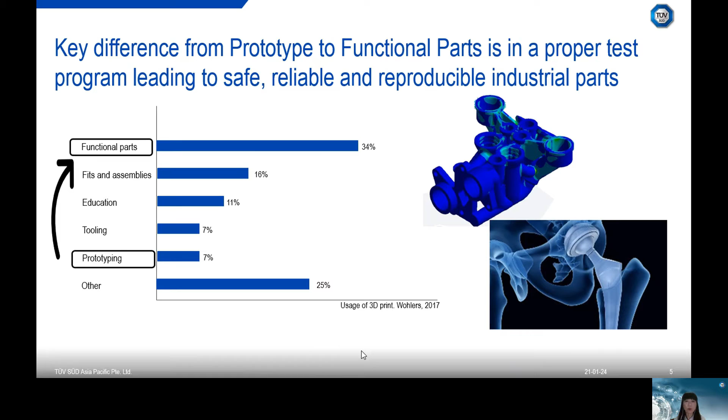Secondly, what we noticed from the Wohlers Report figures is also a transform from prototype to functional parts, which means quality of the parts becomes more and more important, and end users are concerned more and more about quality and consistency than before. That's why ISO and ASTM are addressing this issue by establishing committees like F42 and TC 261, to meet the newly developed standards, and managing quality becomes a focus for service providers who want to stay competitive.

Now let's look at what the challenges are in harnessing AM opportunities for companies who would like to start their AM journey or have already started their AM journey.

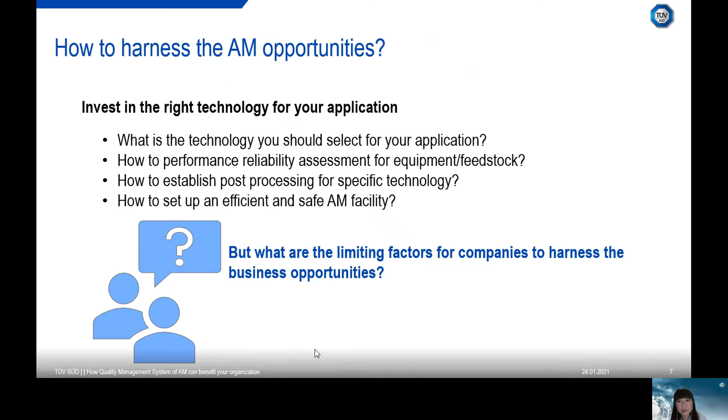So if companies start to adopt AM, can they improve business from these activities? Before that, there are 4 factors you will need to address before you can successfully establish your AM production facilities. I have listed 4 considerations, but there might be more. We have seen companies struggling to establish an efficient and safe facility that meets the applications, and this definitely needs to be addressed before you set up your facility.

Next, let's hear some feedback from end users and buyers. The buyers have some doubts on AM quality. Is it cost versus benefit justified? Can this AM part fit its intended use application? Is the AM part as durable as conventional parts? Am I getting the same quality as the first golden prototype? Or am I fulfilling regulatory requirements, if any?

So what we see is that trust in AM is a big concern when buyers would like to purchase and use AM parts for their applications.

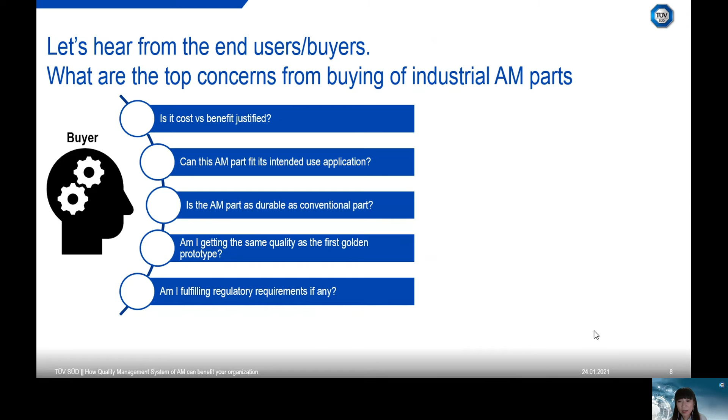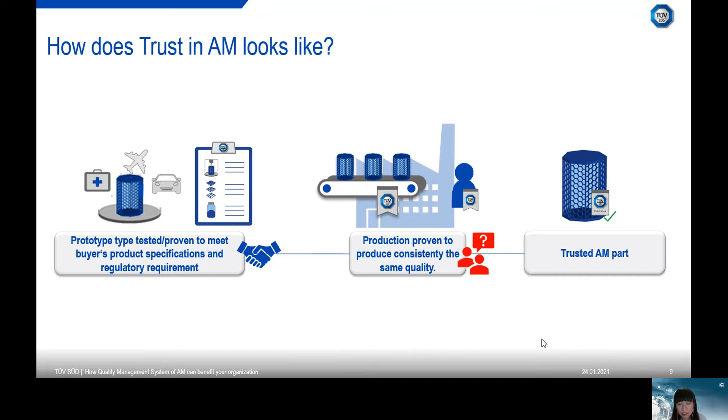Let's look at how trust in AM looks like. The first step is prototypes. It is not an issue gaining trust for prototypes in AM because reproducibility is not considered. However, due to the complexity and uncertainty of the process, it is hard to make sure the parts consistently meet the requirements and quality. When we refer to production or functional AM parts, quality becomes a concern in trust of AM. That's why a dedicated quality management system is definitely needed to address trust in AM in serious production.

Let's look at what is stopping suppliers from proving production quality and consistency to gain buyers' trust. Here are some feedbacks we understand from service providers of AM parts.

The concern is: my customer doesn't ask for it. An audit exposes my weakness and casts doubts. I have no resources or knowledge to build a quality management system, or my operating costs will increase to maintain a quality management system, or I already have ISO 9001, 13485, or AS9100 — a dedicated AM quality management system will help them solve all these issues.

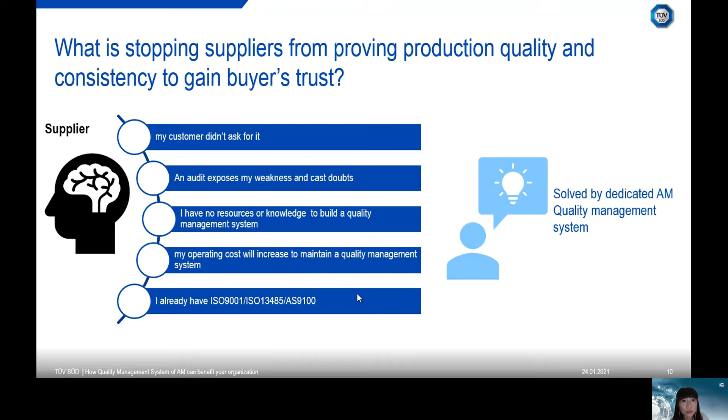Let's see why — what does the AM quality management system solve? Firstly, it gains trust from buyers with a third-party independent attestation of capability through a solid industry AM production quality management system. Secondly, it makes meaningful improvements to your people, policies, and processes to get real savings in cost and time from AM certification. Also, it is a step-by-step approach at your own pace without compromising daily business performance, making it easy to implement.

Let's go to topic number 3: why is quality important for AM? We all know that AM has a complex and less automated process chain, and there are many factors and control points that will eventually affect the final product quality. Let's take powder bed fusion printing as an example. During printing, the powder quality needs to be monitored after each build. As we are recycling the powders, the quality of the feedstock has a huge impact on the final product. Also, the powder deposition condition will also affect the quality, which explains why AM is complex and different in this sense.

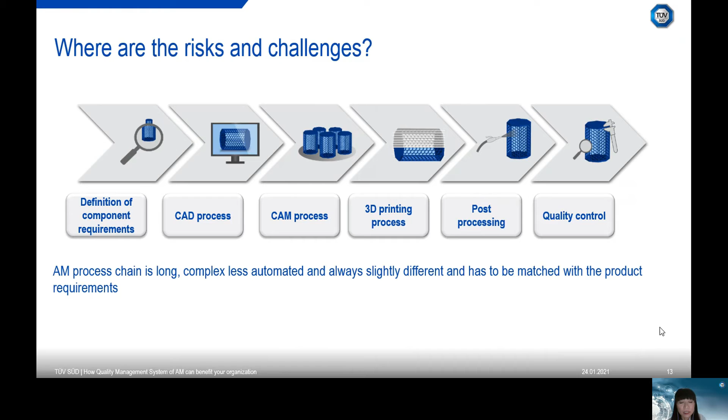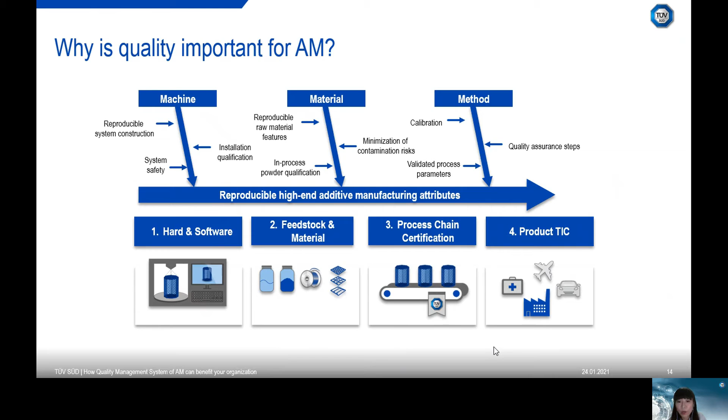Generally, the quality challenges can be identified in 4 big areas. The first is hardware and software, which refers to the equipment and the CAD/CAM software as well as operation software that controls the machine. Secondly is feedstock and materials, referring to raw materials or recycled materials used in the process. Thirdly is the process chain, referring to the whole process from order to product realization. Lastly is the product, referring to final product testing and qualification. Today I will be focusing on how to address the process challenge, and how a dedicated AM quality management system will help you solve this issue.

All right, let's come to topic number 4: steps to success in AM implementation.

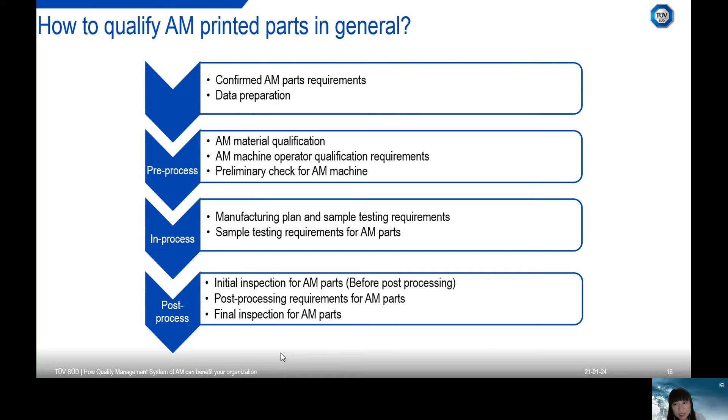All right, you may ask a question on generally, how do you qualify AM printed parts? Okay, in general, it can be further categorized into pre-process qualification, in-process qualification, and post-process qualification. It contains qualified machine, materials, operators, and finally parts after printing process and after post-processing if there is any.

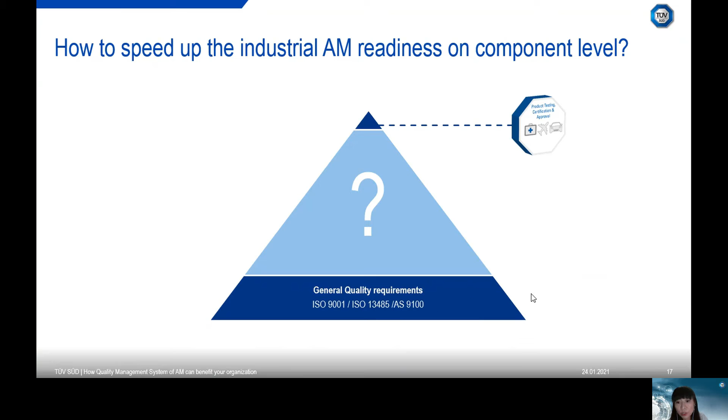After that, knowing that, how do we speed up industrial AM readiness on a component level? Since we already have a generic quality management system that is setting a baseline for our organization, what should we do to fill the gaps in between?

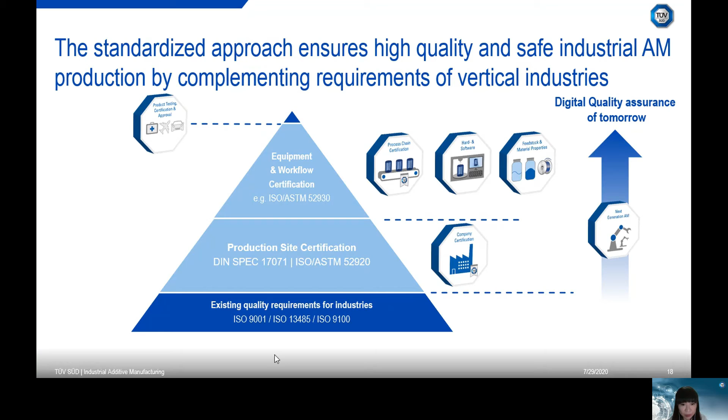All right, we are using the standard approach that enables industrial grade AM quality assurance based on DIN Spec 17071. We have established our AM facility certification that takes care of your AM process in technical level. What is DIN Spec 17071 in general? It helps the production site and AM parts buyer establish alignment and trust. It also helps you to establish effectiveness and control AM specific manufacturing processes and manage your qualities and minimize real risks.

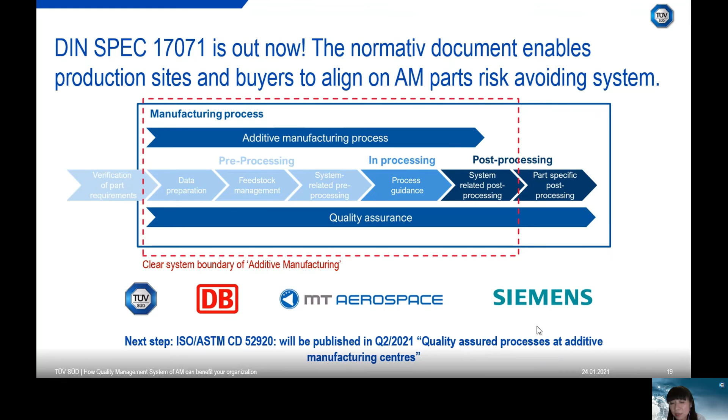It also helps you to solve questions like how to integrate the state-of-the-art standards into the processes and to be prepared for future ones. And also how to reach a reproducible and standardized manufacturing technology, which is comparable to conventional manufacturing. And questions like how to differentiate from competitors and minimize efforts of undergoing a supplier qualification.

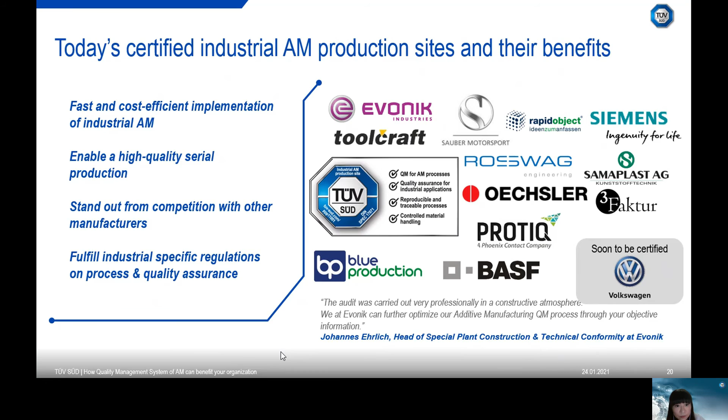All right, you may have another question: what's the difference between this AM quality management system versus a generic quality management system? In general, it contains more than a generic quality management system to address the complexity of AM processes. This certification program is based on 250 criteria, created in accordance with the requirements of OEMs such as Siemens, Deutsche Bahn, MT Aerospace.

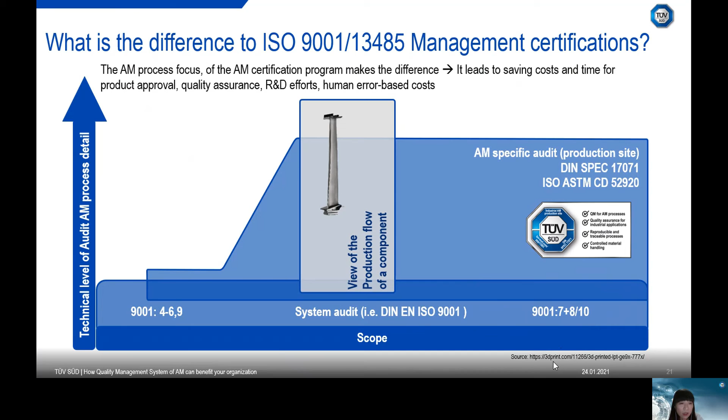It also includes AM specific standards, for example ISO ASTM 52901, which is specific for AM. Also, the generic quality management system does not address how AM specific OQPQ is considered robust, but this standard does consider it. And it also contains all standards under development which are specific for AM, for example the ISO ASTM NWIP 52920-2.

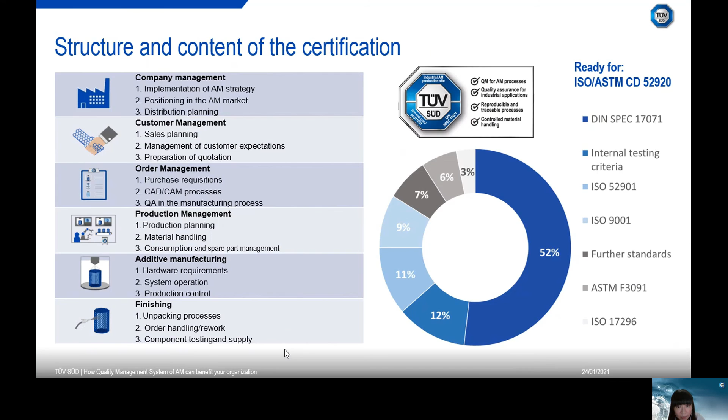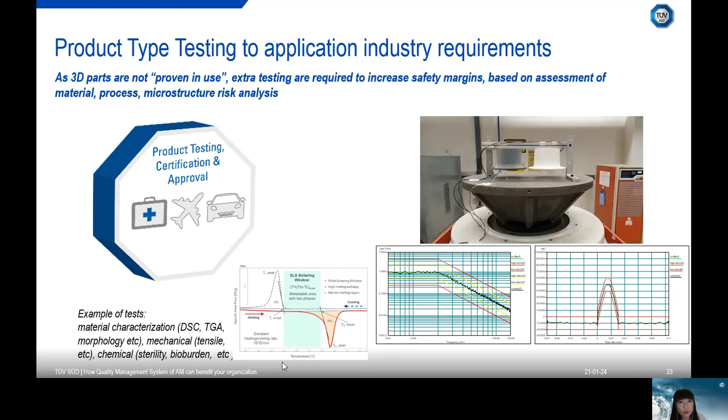Here is another example on how we help the local institutions conducting tests for 3D printed nasal swabs in terms of the mechanical properties as well as the biocompatibility.

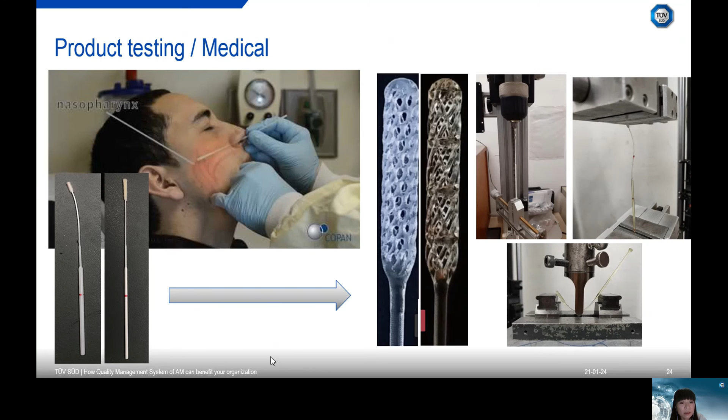Let's go to the last topic, success story for AM certifications. One example is enabling OEMs like Deutsche Bahn to regulate the supplier market using this established certification. They have trust in their suppliers. It creates alignment of buyers and suppliers. This is what we call the trust in AM productions.

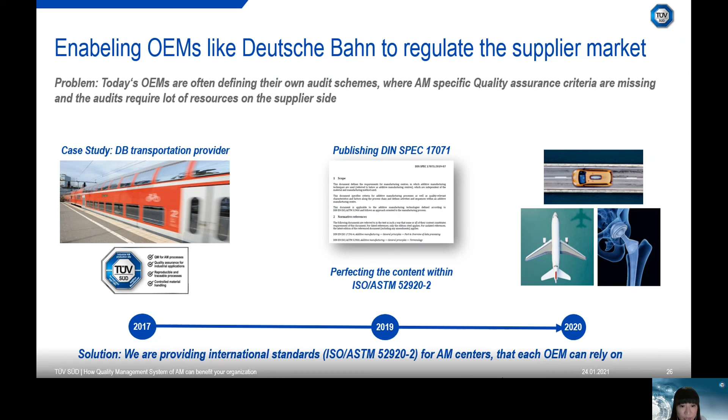It also helps to approve safety critical AM parts for a train from a transportation provider, which at this moment has no such standards available for approving the critical AM parts.

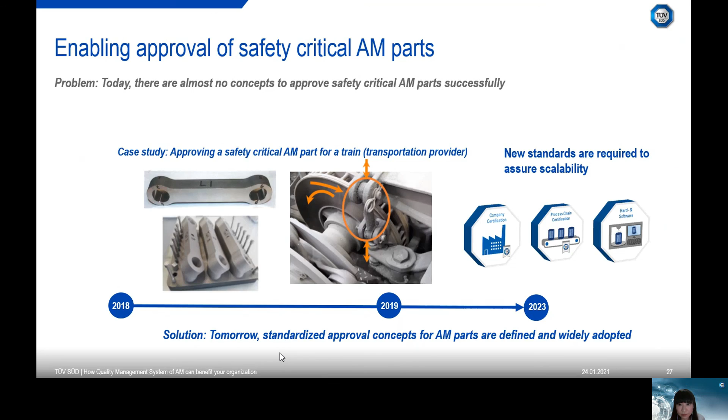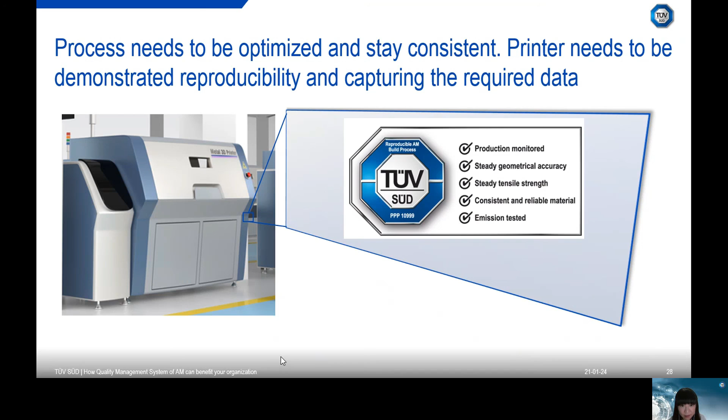All right, we also look at the process. We have these process certifications that address the concerns specifically on machines and materials, which opens the market by certifying the products and systems. This is our first customer in Europe which successfully received the build process certification.

Which we hope to work together to help you address all your concerns and also to help you with all the challenges.